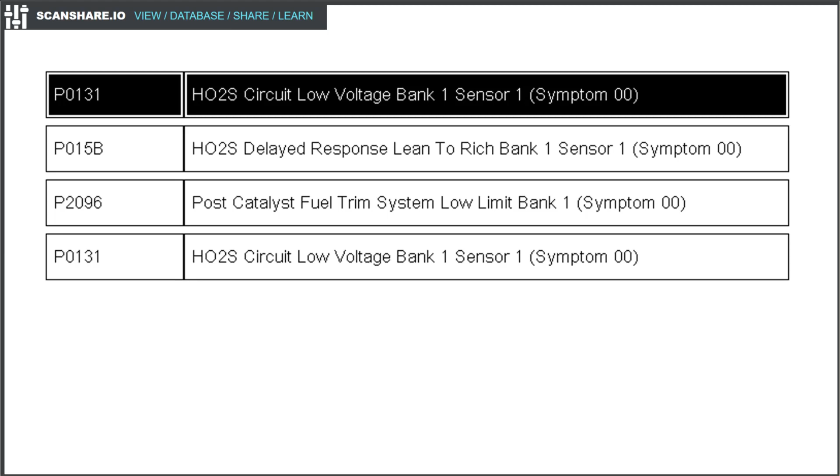Let's begin our analysis with a description of the P0131. This code indicates that the Bank 1 sensor 1 signal has been too low for a period of time.

Service information gives us a short description of the sensor's operation. Let's take a look at what it has to say. The heated oxygen sensors are used for fuel control and catalyst monitoring. Each sensor compares the oxygen content of the surrounding air with the oxygen content of the exhaust stream.

When the engine is started, the control module operates in an open loop mode, ignoring the sensor's signal voltage while calculating the air-to-fuel ratio. While the engine runs, the sensor heats up and begins to generate a voltage within a range of 0 to 1000 millivolts.

Once sufficient sensor voltage fluctuation is observed by the control module, closed loop is entered. The control module uses the sensor voltage to determine the air-to-fuel ratio. A sensor voltage that increases toward 1000 millivolts indicates a rich fuel mixture. A sensor voltage that decreases toward 0 millivolts indicates a lean fuel mixture.

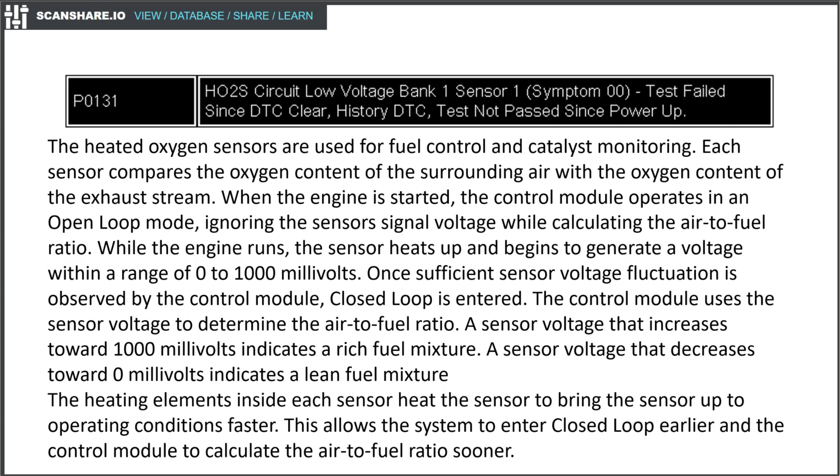The heating elements inside each sensor heat the sensor to bring it up to operating conditions faster. This allows the system to enter closed loop earlier and the control module to calculate the air-to-fuel ratio sooner.

Here are the conditions for running the P0131 DTC. The codes shown are not set. The engine is operating in closed loop. The ignition voltage is between 10 and 32 volts. The fuel level is greater than 10%. The throttle position is between 3 and 70%. The DTC runs continuously when these conditions are met for 2 seconds.

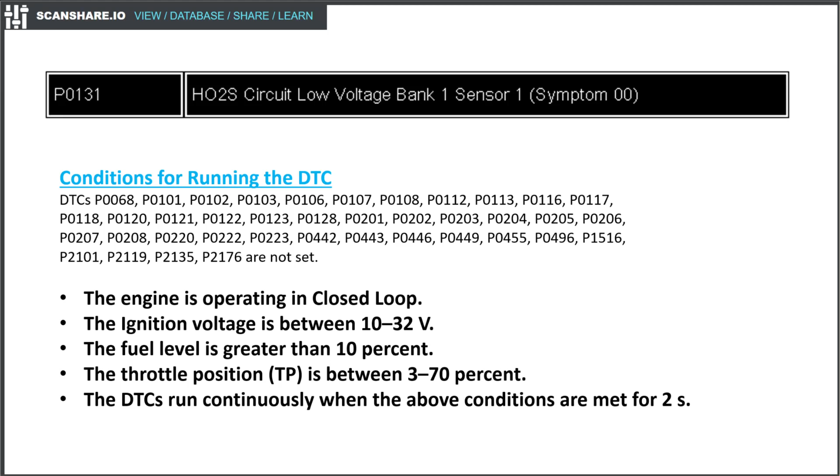Here are the conditions for setting the P0131. The ECM detects that the sensor's voltage is less than 50 millivolts. The DTC will set within 50 seconds when the above condition is met.

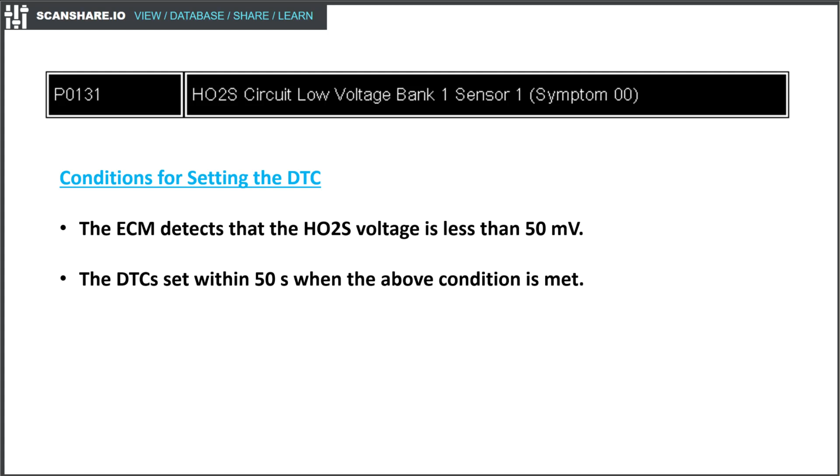Let's summarize the P0131. The ECM saw that the Bank 1 sensor 1 voltage was too low for a period of time. There are two possibilities: the sensor is reading low when it shouldn't be, or the mixture was lean.

If the sensor is reading low when it shouldn't be, then the fuel mixture on Bank 1 will be richer than it ought to be. This is important to consider when we look at the P2096.

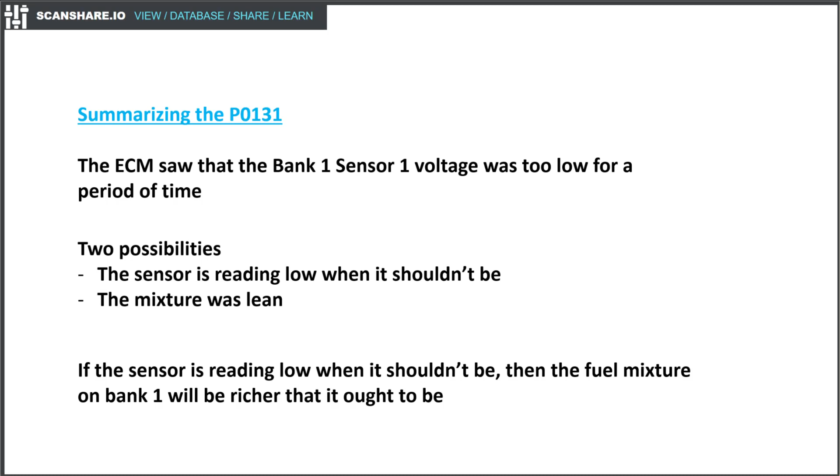Now let's look at the P015B. This code indicates that there was a delayed lean to rich response from Bank 1 sensor 1.

Service information states that the conditions for running this DTC are: the codes listed are not set. The engine coolant temperature is warmer than 129 degrees Fahrenheit. The intake air temperature is warmer than -40 degrees Fahrenheit.

The ignition voltage is between 10 and 32 volts. The fuel level is greater than 10%. The engine run time is greater than 60 seconds.

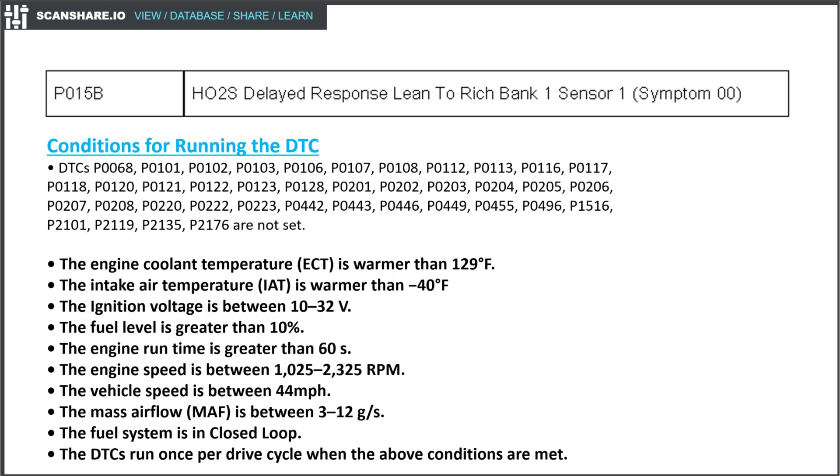The engine speed is between 1025 and 2325 RPM. The vehicle speed is between 44 miles per hour. The mass airflow is between 3 and 12 grams per second. The fuel system is in closed loop. The DTCs run once per drive cycle when the above conditions are met.

Here are the conditions for setting the DTC. The ECM detects that Bank 1 sensor 1's rich to lean or lean to rich average response time is greater than a calibrated value. The DTC sets within 60 seconds when the condition is met.

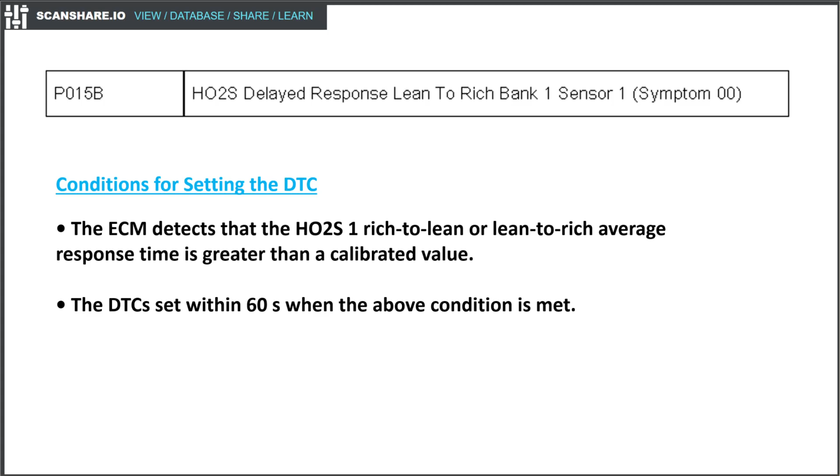So let's summarize the P015B. The code indicates that the sensor has a lazy response. It is either hanging low too long, hanging high too long, or both.

Now let's look at the P2096. The code indicates that the post, or downstream, fuel trim system has exceeded its low limit on Bank 1.

The conditions for running the DTC are: none of the codes listed here are set. The barometric pressure is greater than 70 kPa. The manifold absolute pressure is between 0 and 255 kPa. The intake air temperature is between -4 and 302 degrees Fahrenheit.

The engine coolant temperature is greater than -4 degrees Fahrenheit. The engine is in closed loop status. The fuel control intrusive diagnostics are not active. DTCs P2096 and P2098 run continuously when the conditions above have been met.

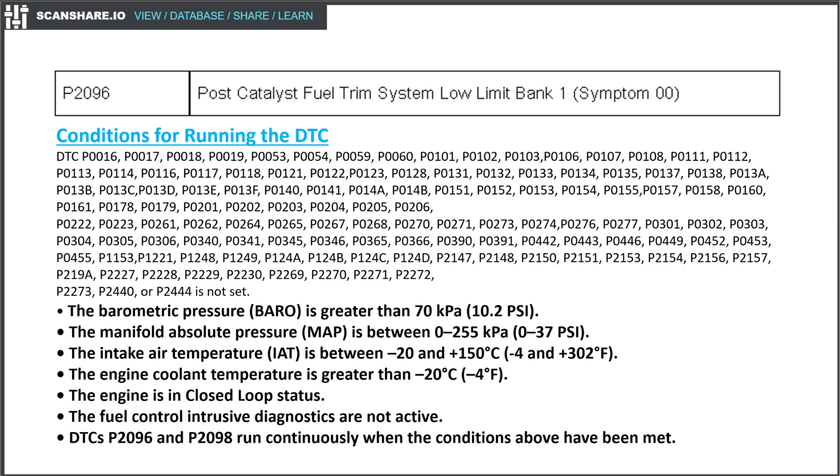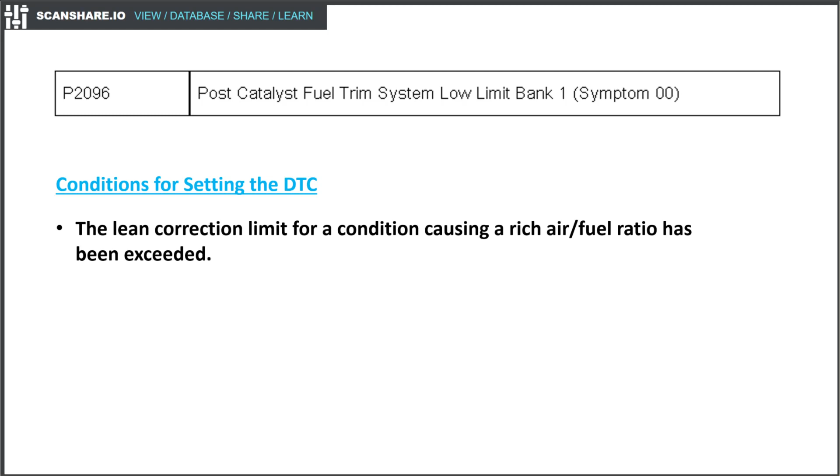Let's summarize the P2096. The downstream O2 sensor has a small amount of authority to adjust the air-fuel mixture so that it is just slightly rich, typically around the 700 to 750 mV range.

The upstream sensor appears to be skewed so that it reads leaner than the mixture actually is. The downstream sensor is using all of its authority to bring the mixture to the right air-fuel ratio, but it is not able to do so.

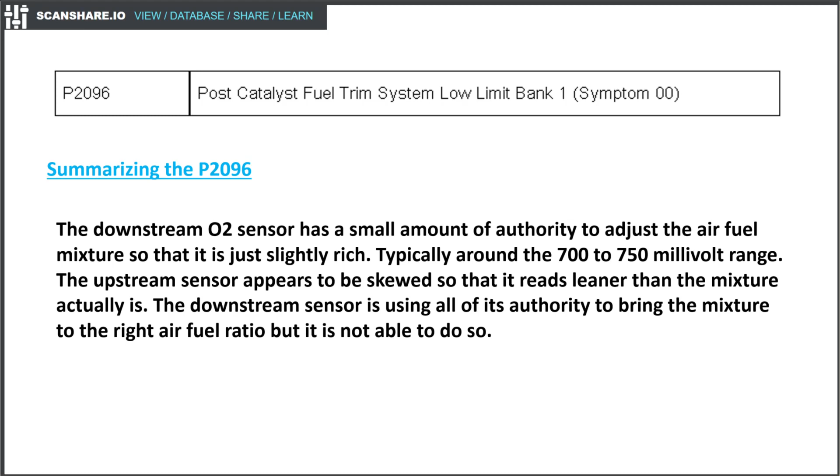Could it be the case that the downstream sensor is at fault and not the upstream sensor? If that were the case, then we would have to ask some questions.

Why is the upstream sensor coding for being low? And why is the upstream sensor also coding for being lazy?

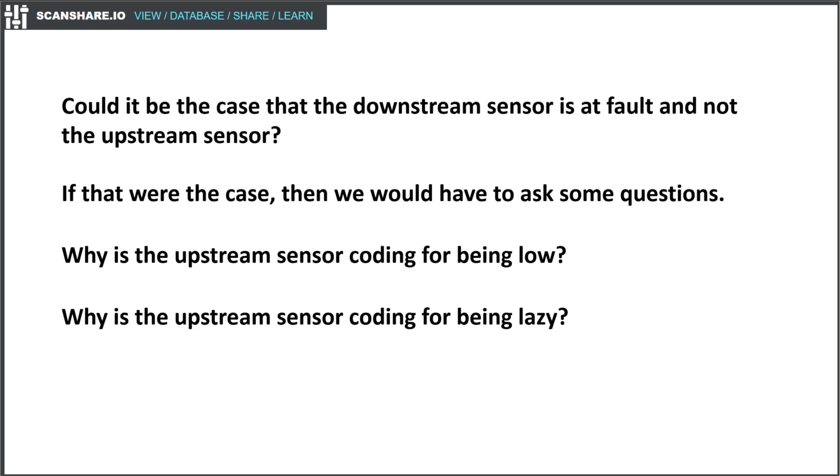Here is part of the scan data from part 1. The engine was warmed up and there isn't anything obvious going on with the Bank 1 upstream sensor. But I have one more thing to check before I sell any parts.

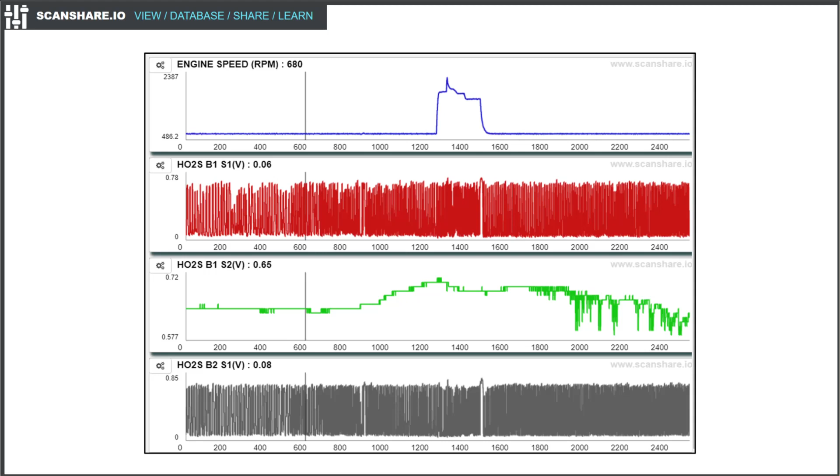I checked for any obvious exhaust leaks and didn't find any. I'm ready to sell parts.

Wait. Is there one more check, something easy, that I can do before I sell this guy a Bank 1 upstream sensor? I can let the engine cool down and start it up cold to see if anything odd is going on with the sensor.

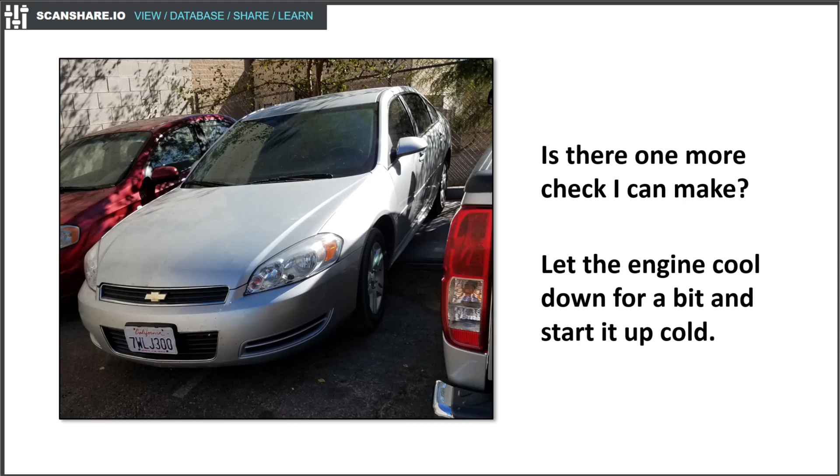Here is what I found. About 12 seconds after startup, the sensor came online and the voltage dropped to 0. It stayed there for about 70 seconds. It is possible that the heater circuit has failed, but I was pretty sure that would have set a code.

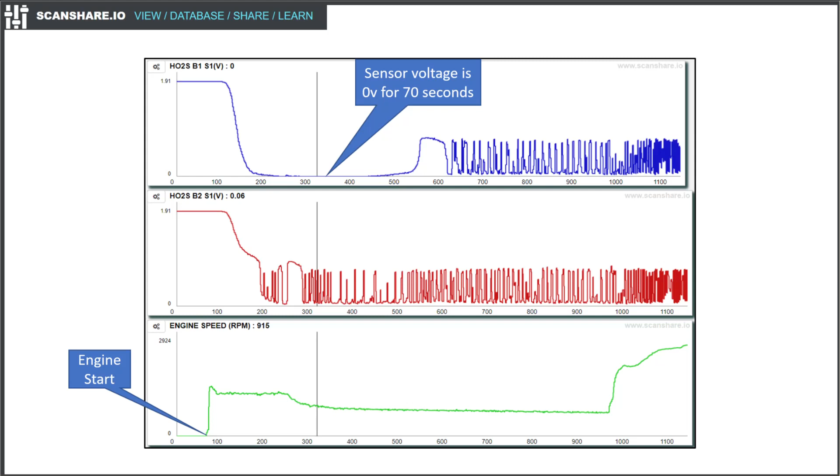With what I had at this point, I had no trouble recommending a new sensor. The customer agreed and authorized the repair. The problem was fixed. Thanks for watching.